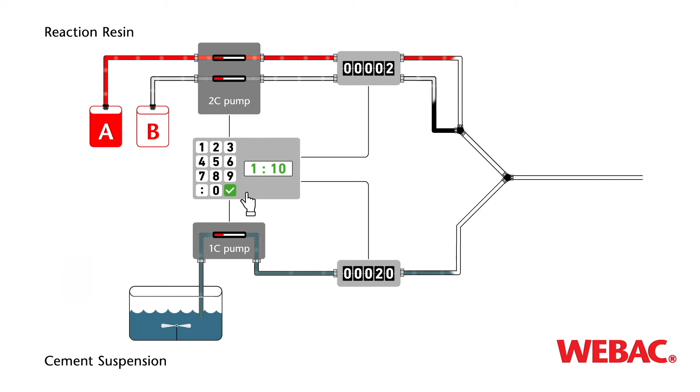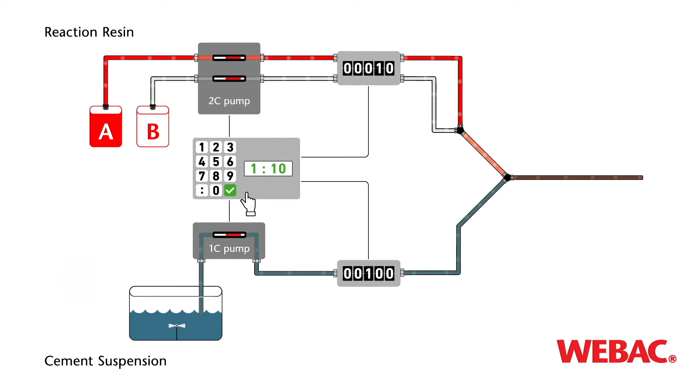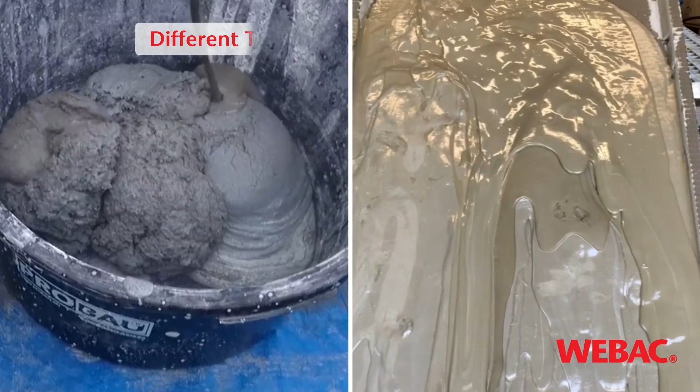We prepared for you today the hybrid system. The hybrid system is the combination between the traditional cement grouting plus chemical grouting. And to take you with us, we have prepared a small animation of how it works. So, like I said before, it is a combination between the traditional cement grouting and the chemical grouting. The big advantage with this system is that you can run it 100% automatically. So, with a computer in between, the system is totally self-regulating and you also have the choice between different mixing ratios. So you are able to change the product properties to the conditions on site, how you need it.

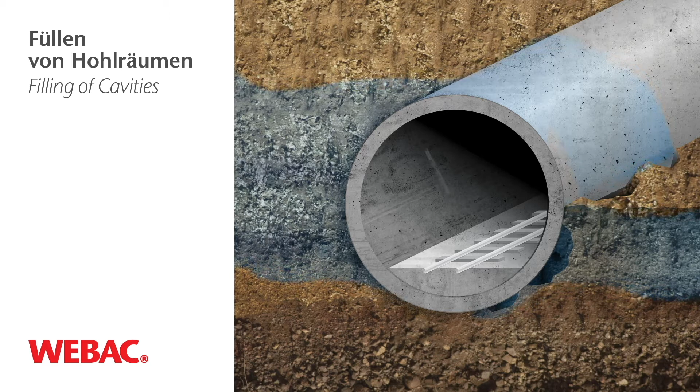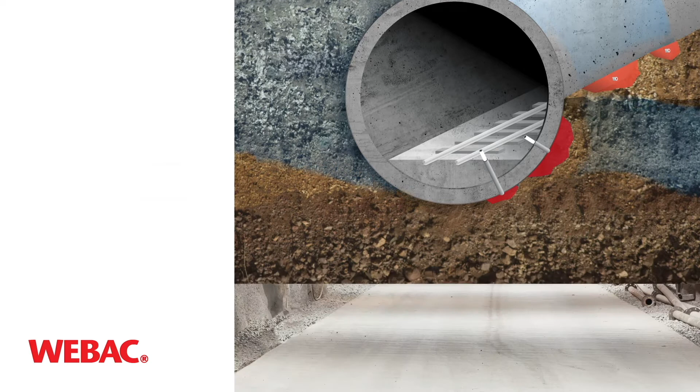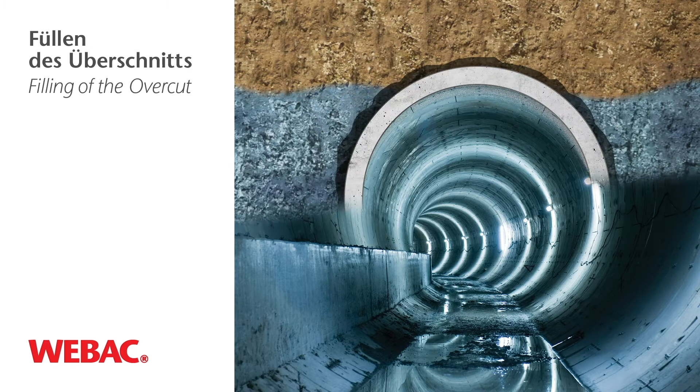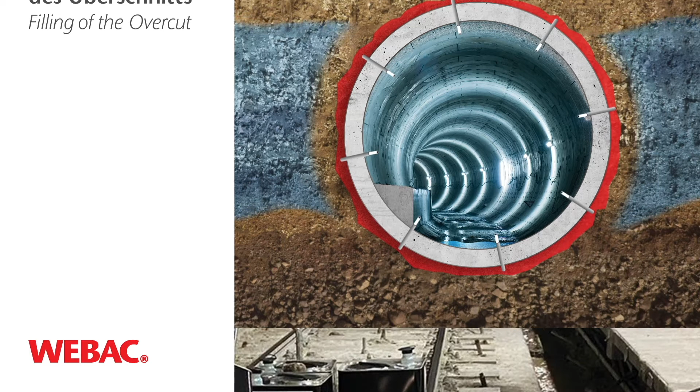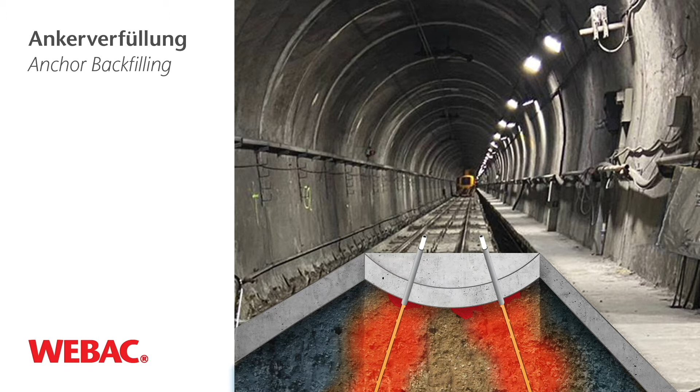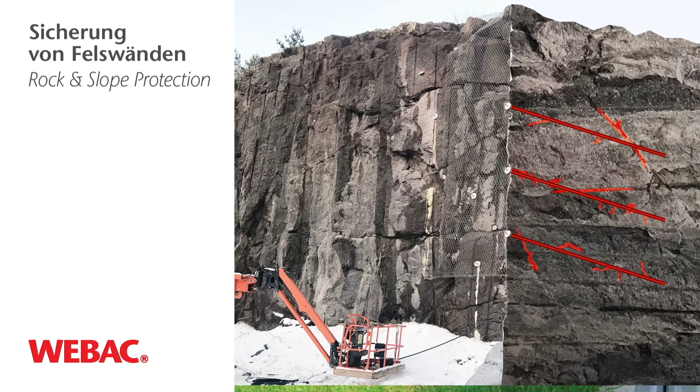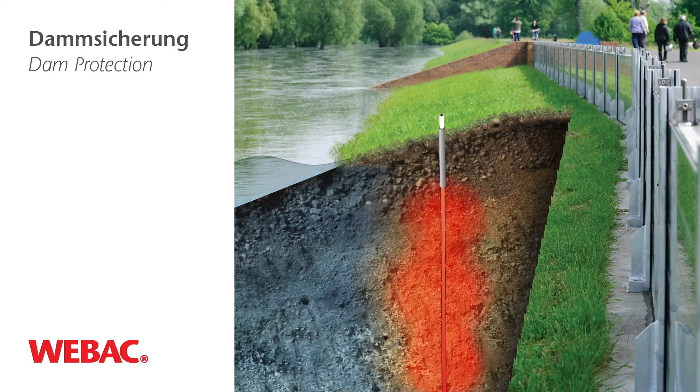It is also possible to use it for anchoring, both with tension and with pile, positive and negative. It is useful for slope stabilization and rockfall protection. And as you can see here, it is working in all climatic conditions. We can adapt the properties with our WEBAC toolbox. It's also for dams and hydraulic structures, for embankments and ground improvements, where you have big streams in the underground and need a fast reaction.

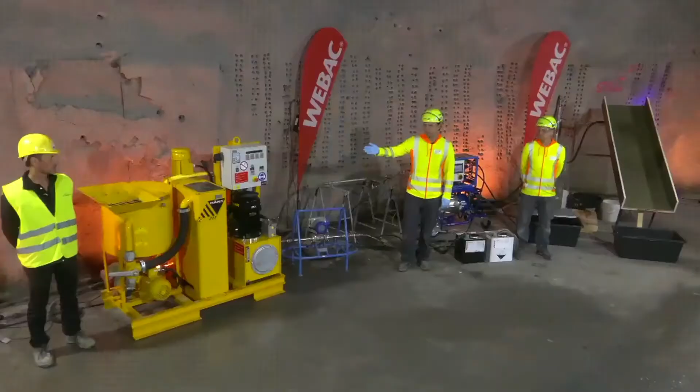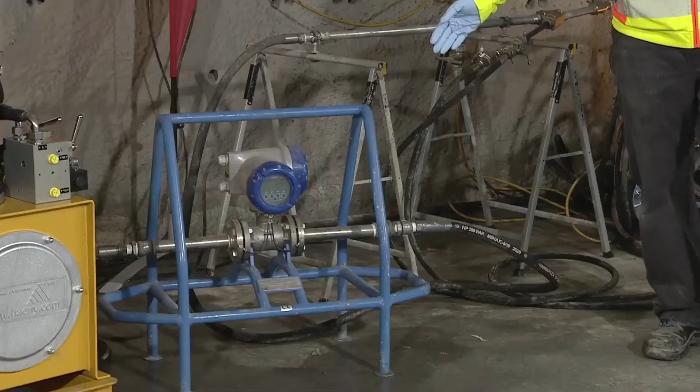So now you have seen how it looks in theory. Now we are coming to the practical part. On this side you can see the cementitious pump. We already pre-mixed the cement. We use the CEM I 42.5 with a water cement ratio of 0.8. So mixing has been done. This pump is operated by Hans-Jörg from Häny, and we would like to thank them once again for their support. Next to the cementitious pump, we have here a flow measurement unit for the cement line, so we can control the flow of the cement during the injection.

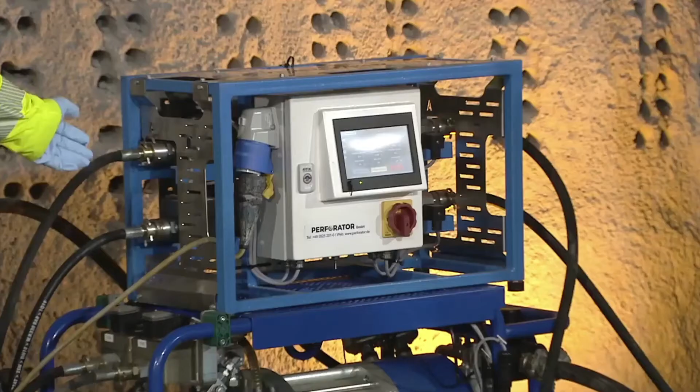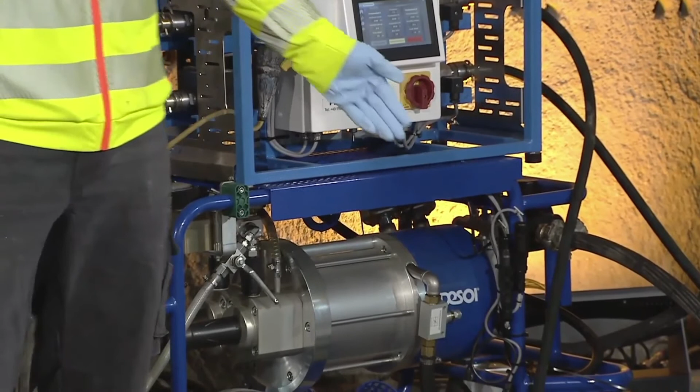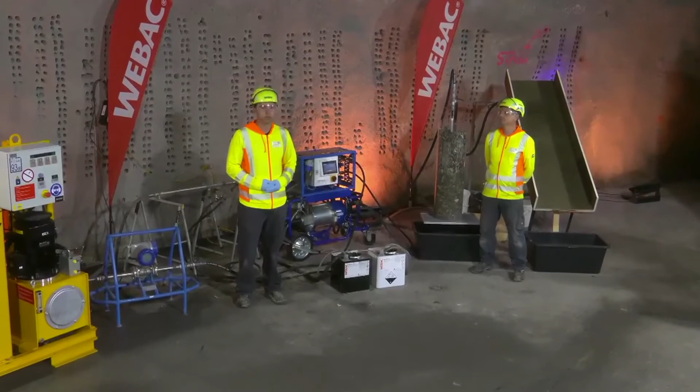On the other side, we have our chemical two-component pump. This is a very common pump, and on top of this pump, once again, a flow measurement to control the mixing ratio between the cement and the construction chemicals. And in front, you can see here on the bottom, two canisters with our injection material WEBAC-Chemie, two-component, fixed mixing ratio of 1:1 parts by volume. And now Stefan is going to tell you what we are going to demonstrate in the next minutes.

Thanks, Maurice. So for this event, we prepared two mock-ups, which give an overview of the product range we can adjust with that. First, you see a cylinder which is filled with gravel, and it's a little bit difficult to see, but we filled it half with water.

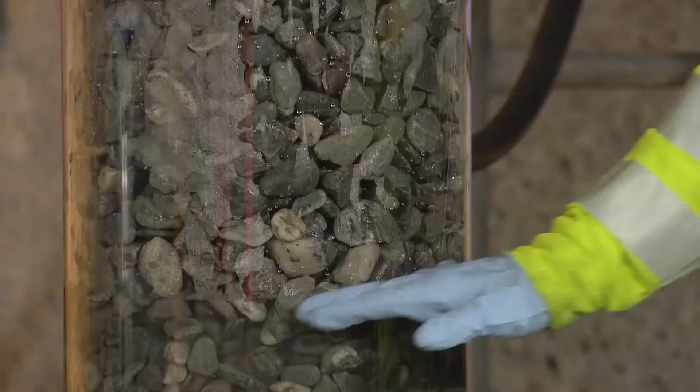The target for that application is to push the water out using a hybrid system, which is a thixotropic version. In that case, we push out the water and fill all that cavity with the cement and the hybrid mixture. On the other hand, we prepared a ramp like this. There we want to show the flowing of the material.

Everyone knows that if you pump the cement on top, it will run down. But with that material, we are also able to adjust it to make sure that we don't have this high amount of flowing of the cement line. The target is that we can stop maybe in that area here. And yeah, I think everything is said. So I would step backwards and say, let's go.

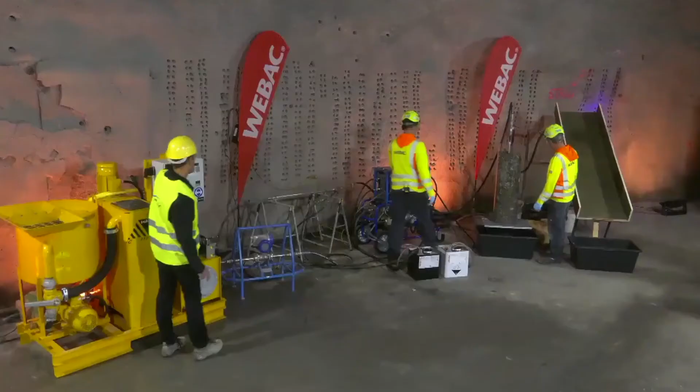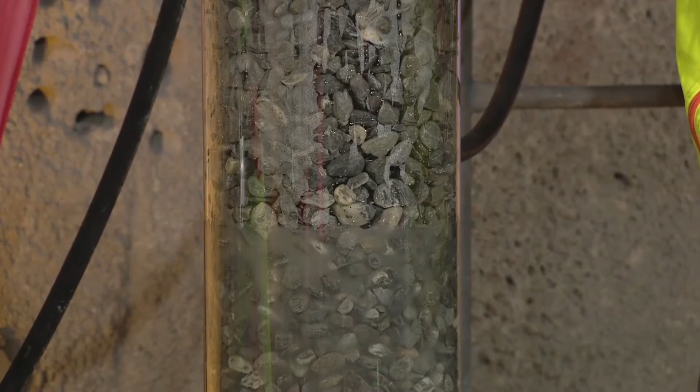Yeah. So now we are starting filling the cylinder. You see it gets a little bit darker now, and darker means the cement will start working there. We try to push the water upwards.

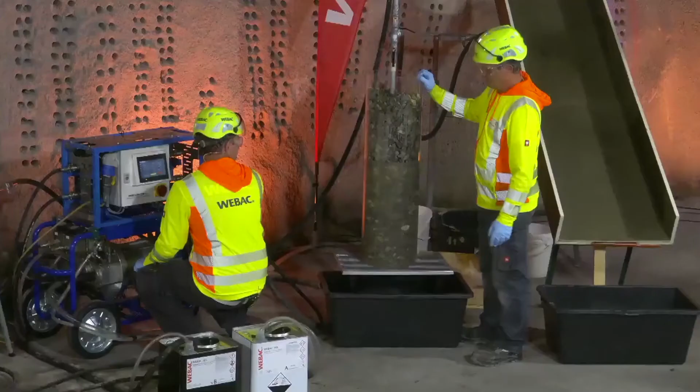Maurice is checking the mixing ratio during this part of injection to make sure that we have the same level between cement grouting and chemical grouting. Now it gets filled a little bit more, and we push the water upwards and upwards.

Here you see all the cavities, or let's say honeycombs, in the gravel getting filled more and more, and the water level is rising up. And we won't have any dismixture of the cement line and the water inside. Now we're coming higher and higher, and everything looks really rigid in that area.

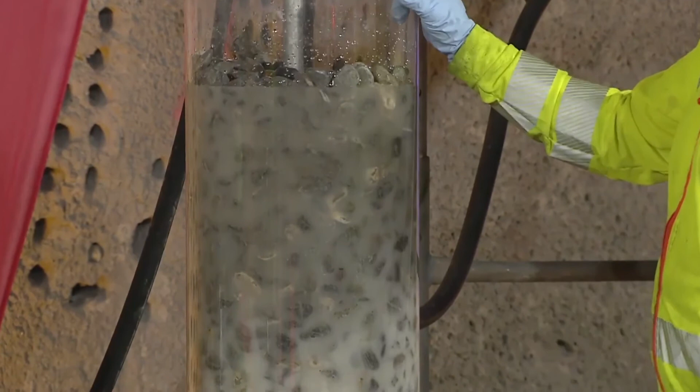The mixing ratio of cement, like Maurice explained, is 5 parts to 1. So we have a smooth mixture to push the water out of that cylinder. Now we're coming higher and higher.

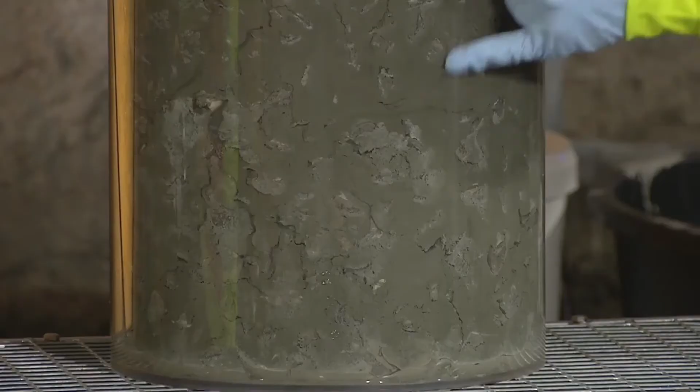Goes upwards and upwards. And here we see the reaction of the material starts, so it's much more rigid now. Nothing is flowing anymore in that area, only on that part where we push the water out of the cylinder. You see it really well here on that example. Push out and fill it from the middle, right, get a good block there.

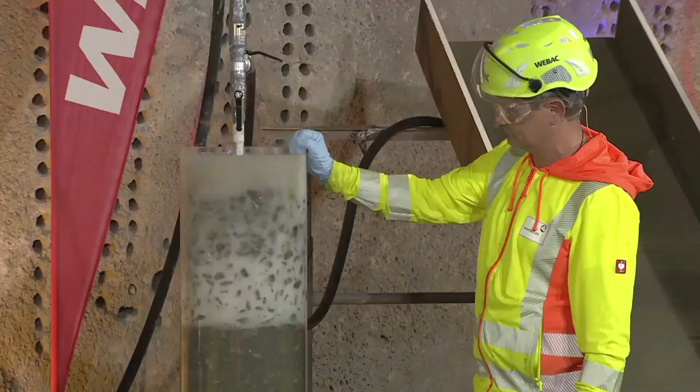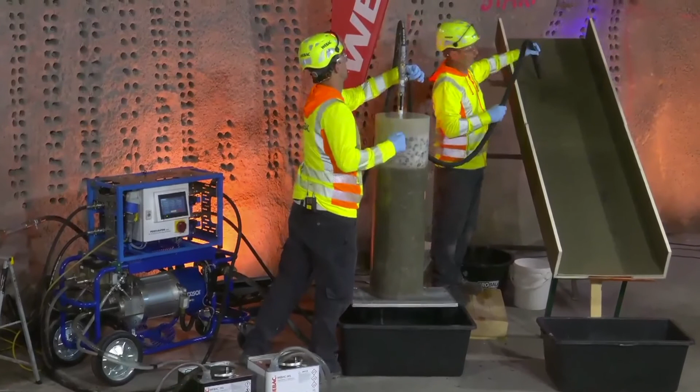What you see really well here is the push out of the water, which comes out here, and the pure rigid material on the bottom of the cylinder. Okay. Now we switch to the other application to demonstrate the flowing of the material on that ramp. Thank you, Maurice.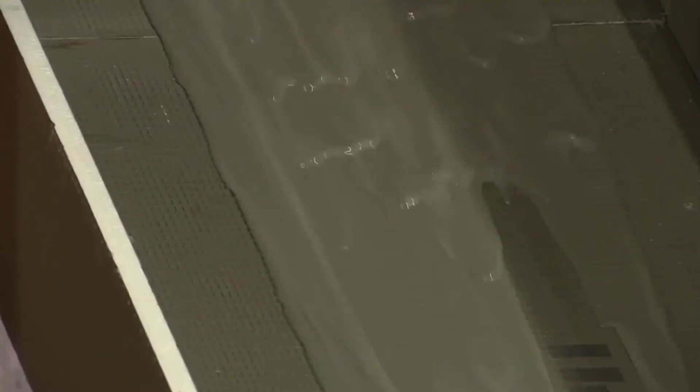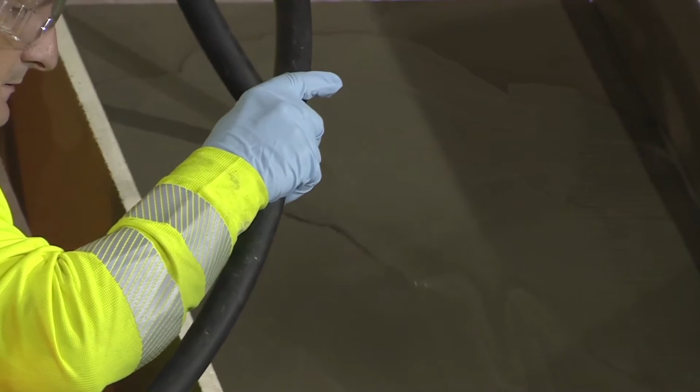This is like you know from the cement line, so it flows down. Takes a little bit of time, but now it gets more and more thixotropic here in that area. And you see it's less flowing. Now you can see the first stopping in the middle of the ramp here. So it pushes down, but only half the way.

If I go that way and I go back, you see it comes down and stops. So that means the thixotropic effect of the material starts. And we are able to fill the material inside cavities with a water movement inside the structure. See, really good. Now we are at the point where it flows only half a meter.

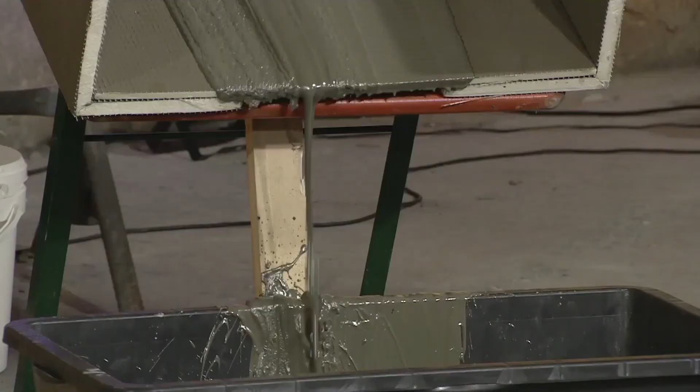And the important thing is the lower foaming factor, which is also necessary if you have weaker structures, where you don't want any foam pushing pressure on the structure. There's a good version here. Now we have a good result. You see, it flows down, but it stops immediately. This is what we want in that case.

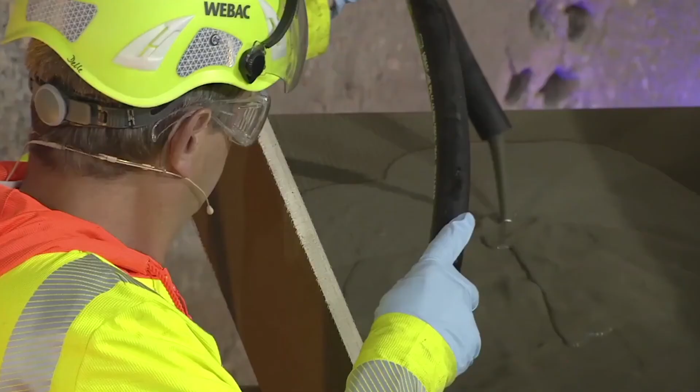Sorry guys, it's only cement, it's not chocolate. We are in Switzerland here, so.

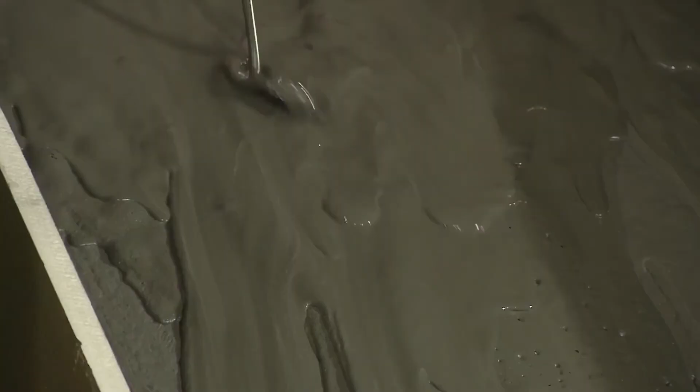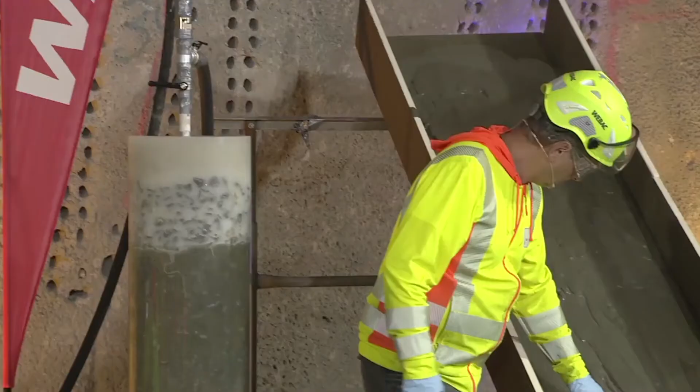Okay. Well, we are ready. We have to flush it a little bit. So finally, we flush down the pump. This will be done with a cement line and with a cleaner or with the A component. And as you see, it is really rigid. You can touch it and it's hard. So that means you are able to fill cavities without any loss of material.